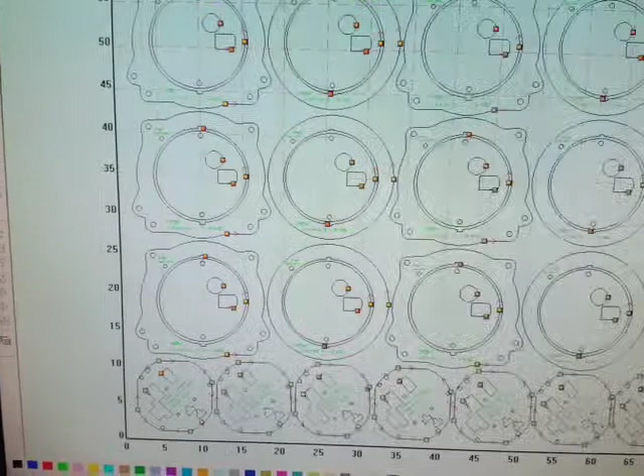Now this file, when you do File Open, this is a file that's set up. It has all the parts in there, has all the settings all ready to go. We only do this on a few different files for things that we cut a lot of and things that we cut all the time. But mostly you'll be doing this process here.

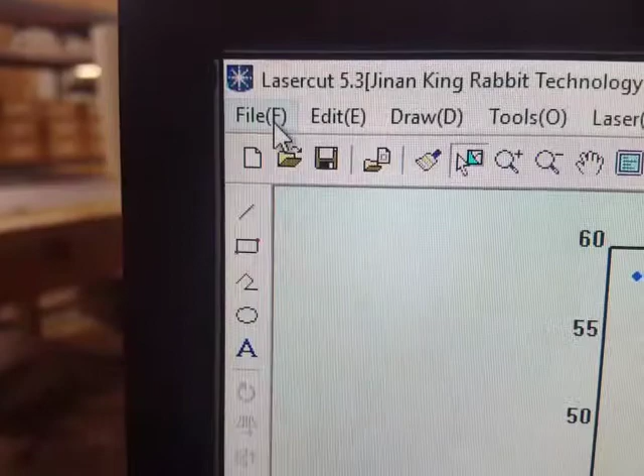So we're going to go to File, New, Save Changes - no, we're not going to save any changes. File, Import. So we're going to go ahead and open up a file. If it says cannot open, hit OK. Now you can open two types of files. It'll show a preview, then select Open, just like any Windows dialog. If it asks, can I import image data, just hit OK. That brings up the file.

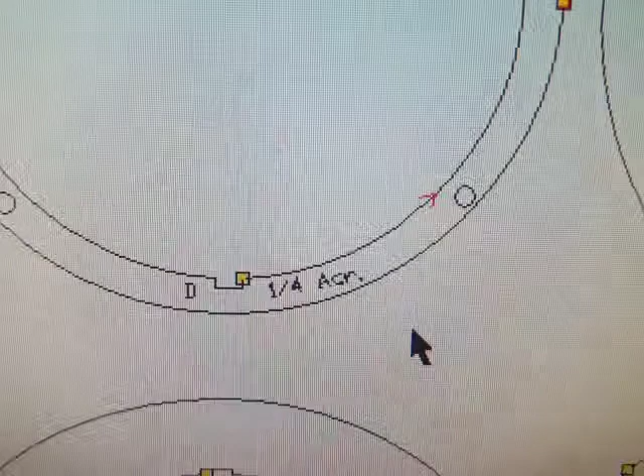Now I'm going to show you a couple things on the file itself. First thing is, on every file, it tells you what type of material, the thickness, what to do on everything. A general rule is - I'm going to click over here - anything like these callouts here are always engraved. So we don't cut those, we actually just lightly score the plastic so that the markings are on the parts.

The other thing to notice is, see how this circle is a complete circle? And this part here has all these little arrows on it. That means those are all segmented lines, and this piece will cut fine, but the laser will cut this piece, then this piece, then this piece, so it's going to take longer and be less efficient.

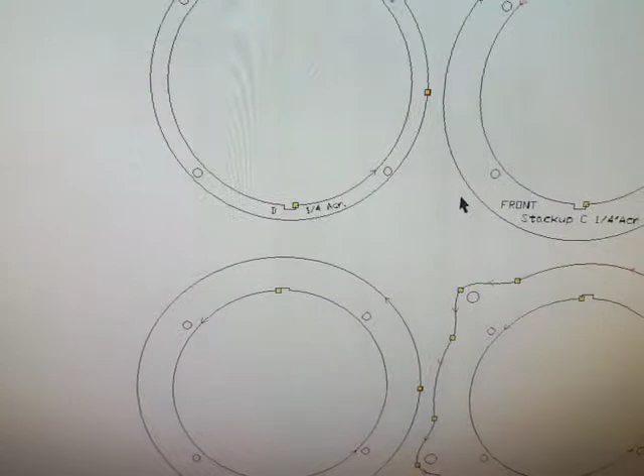Okay, so I'm going to show you two things right now. First thing is I'm going to show you how to set up a job with different colors to change the power settings. So first thing we're going to do is I'm going to show you how to get rid of these lines. So I'm going to zoom out and use my pick tool, which is that right there.

I'm going to select the job or the parts. Then I'm going to go to Tools, Unite Lines. You shouldn't need to touch this - usually 0.5 millimeter is fine. It says the tolerance - that means the tolerance that these lines will connect. I'm going to hit OK. There you go, see how that's one solid line now. Now that'll cut in one line.

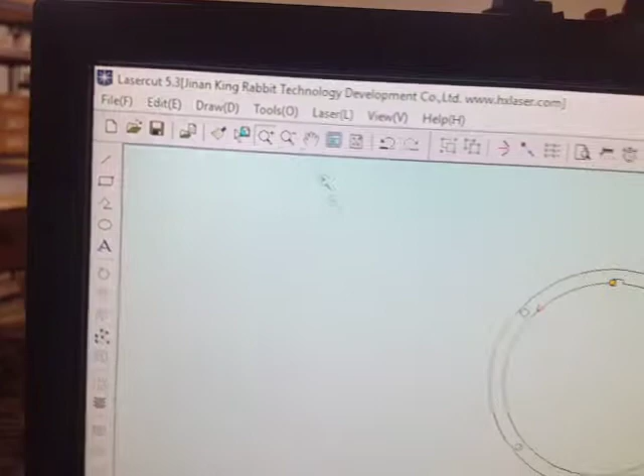Now to change - okay, here's another tool, you've got your zoom in, zoom out. I'm going to zoom in on this here, make it easier. Now I'm going to go back to my pick tool here, and I'm going to select this.

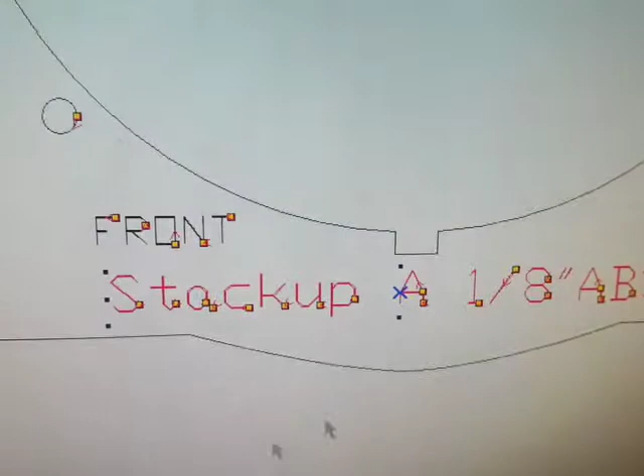And then I'm going to go down here to the colors. You can add whatever color, change it to whatever color you want. Click off it - now that's red. I'm going to change this to red as well. There we go, both red.

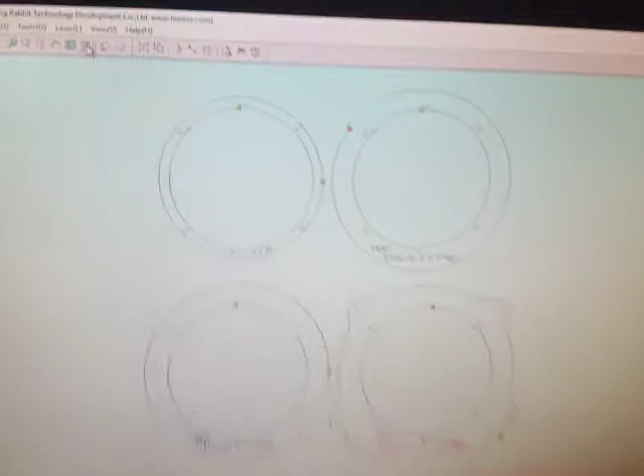Now what I'm going to do is I can use this - we'll zoom to everything if I use this one here. Okay, so I just noticed that this job is not on the actual table itself, so I'm going to select it, push Control Y. There we go, now we're on the page.

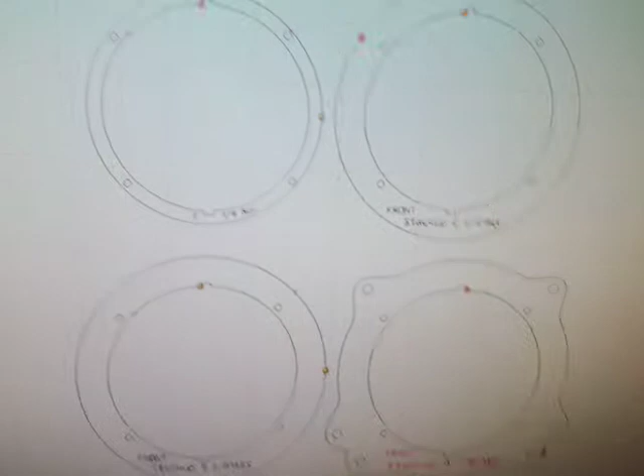Okay, so now I can do a couple things. I can zoom to the part. If I use this tool here, I can zoom to the table - it'll show the whole table. So now over here on this interface, I've got the red and the black. I can move these up and down. What this will do is change the order that the parts are cut.

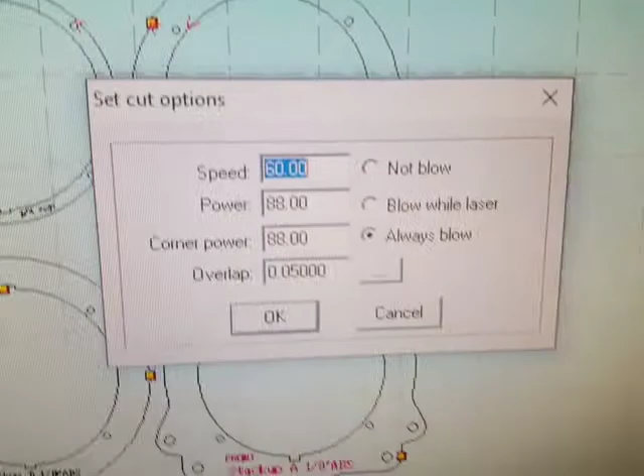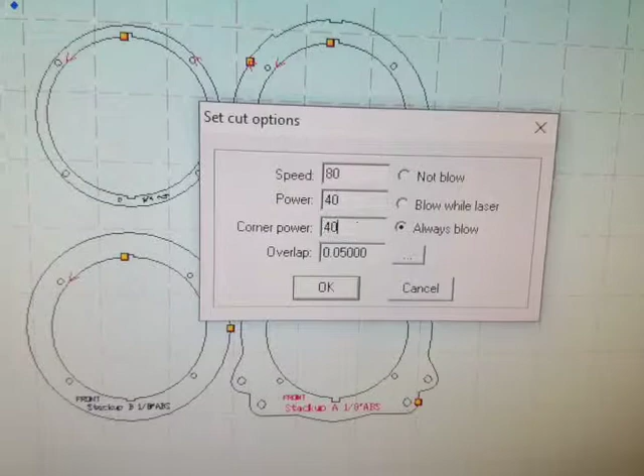To change this, for example, I'm going to make this lightly score on the red. So this dialog box will pop up. Over here on the wall are all the different settings that we need, so you can always refer to that. To do a light score, I'm going to change the speed to 80, power to 40, corner power 40. Generally, power and corner power are the same. The overlap is the amount that the laser will overlap where it starts and stops on these little arrows here. Hit OK. And then so we're going to lightly score this piece here.

As you can see, it says right on there 1/8 inch ABS. So I'll go look over here on my sheet. Okay. I'm going to go back over here to the setting, double click. I'm going to set that to 10, 88, 88.

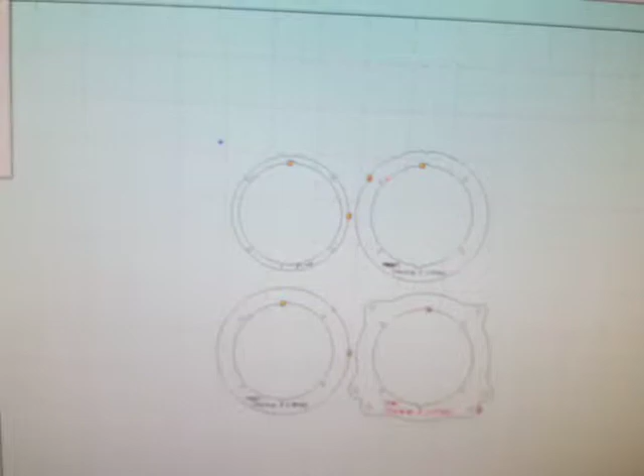Alright, so that's just a quick overview of that. So now let's actually run a job. Okay, so File, New, Save Changes - no. File, Import. We're going to cut some refractors.

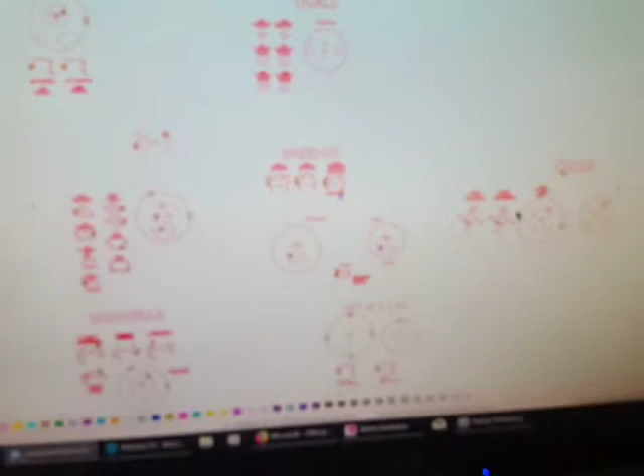Now, either in the build book, okay, this is our refractor file, has all the Phoenix refractor parts. So now what we're going to do, sorry, it's a little out of focus, I'm going to zoom in on a few things here.

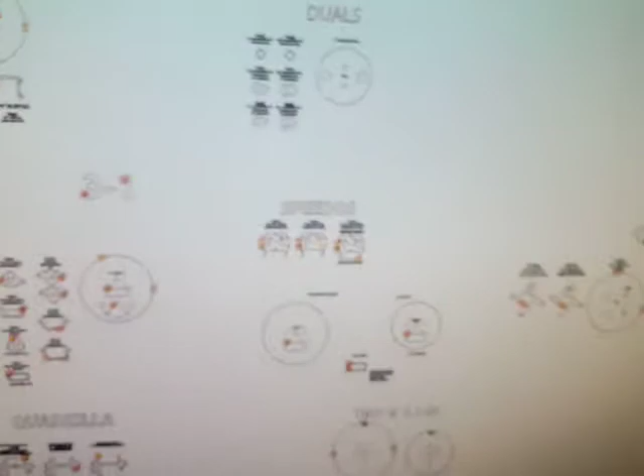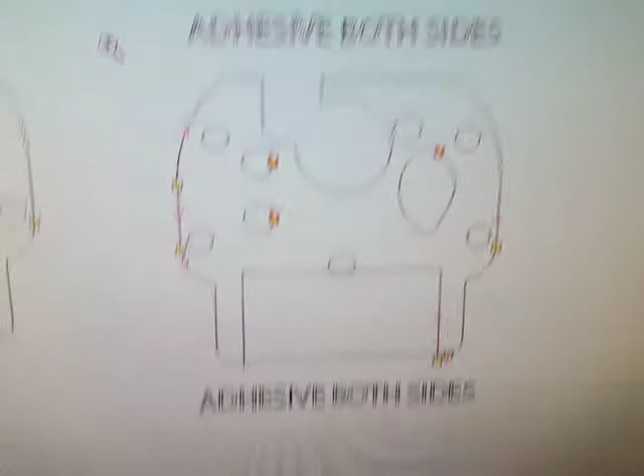Now, if it's not in the build book, it's in the file itself. So it always tells you the thickness, tells you if there's plastic. The parts always face up, so it says this piece would have adhesive on the back, 060 poly or ABS, adhesive backed, adhesive both sides. A lot of these parts, like this, will have a score mark. So it's pretty straightforward. If you have any questions, just ask.

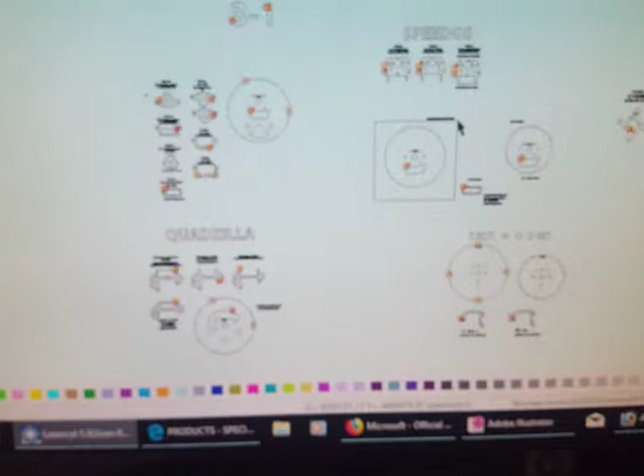So what we're going to do is cut some speedometer refractors. I'm going to grab this—make sure you grab the whole thing, it's okay even if you grab a little extra. I'm going to move that over here for now, and then cut some tachometer pieces. Move that over here. We're going to cut a few different things here.

Okay, so I've got the pieces I want over there just to get them out of my way. I'm going to delete all these things I don't need.

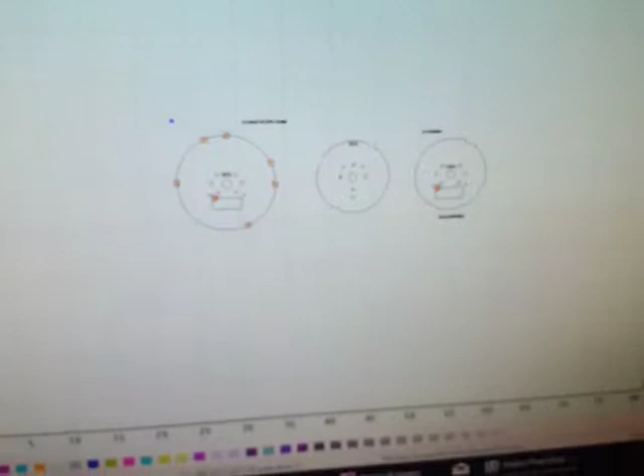Okay, now notice I don't see a grid on here, so that means we're not on the table. So I'm going to select all my parts, hit Control Y. Okay, all my parts are on the screen. I'll use my pick tool to delete some of these things.

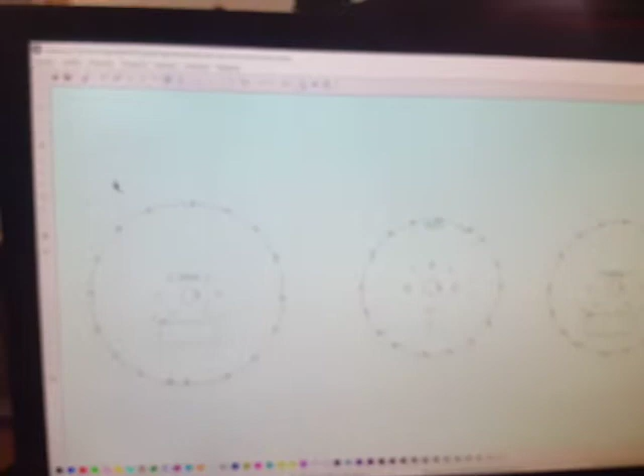Okay, now see how all these are segmented? Again, I'm going to select the parts, tools, unite lines. Okay, now they're all solid pieces. That'll make cutting a lot easier.

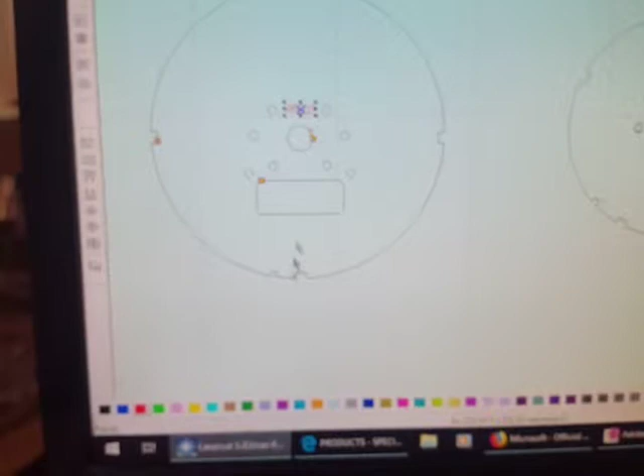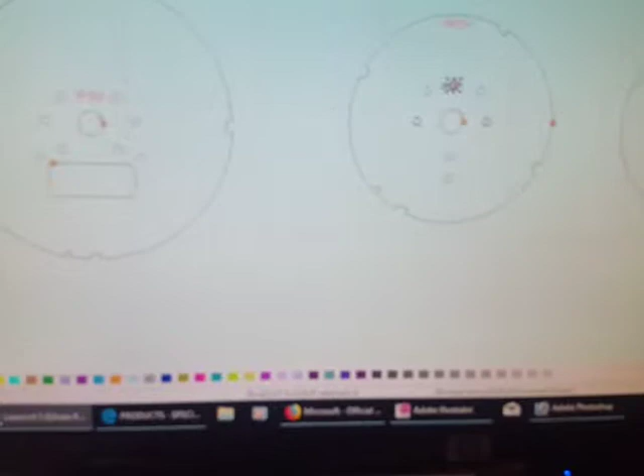So the next thing I'm going to do is change all these call outs to identify the parts. I'm just getting rid of some stuff we don't need.

Okay, so now I'm going to zoom out. Now the next step is using your plastic efficiently. Obviously we don't want to cut these parts just spaced out like that—we want to use the material efficiently. There's a couple ways you can move a part.

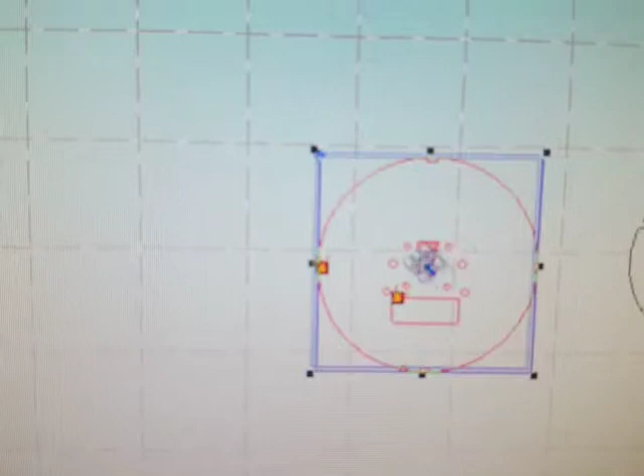You select the entire piece—see that little X on the center? Once your cursor goes like that, you can move it. Now, if you ever make a mistake, like let's say you do this, and then you go to move it, and the part gets messed up.

Oh, see, now the part's wrecked. You can always redo it, or you can hit Control Z to undo. Or you can go Edit, Undo, and it'll move it back.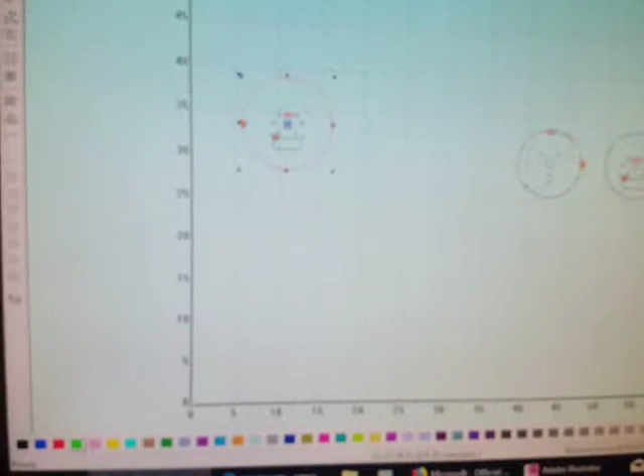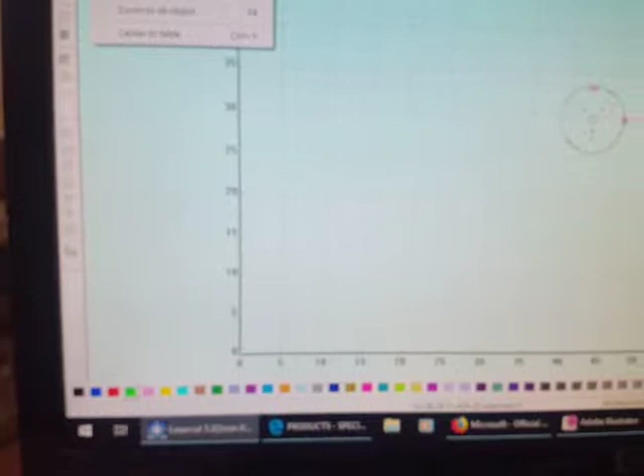Okay, so you can move the parts like this, but I recommend using the arrow keys—that'll make it much less problematic, especially when you're duplicating parts. So we're going to select the part, edit copy, edit paste, and then start moving these pieces till we fill up the screen. The general rule is the space between the parts should be greater than the thickness of the material.

Okay, so here is our job on the table, ready to go. This outline here is not the size of the table, it's the size of the plastic. So as long as you're within here, you should be good to go.

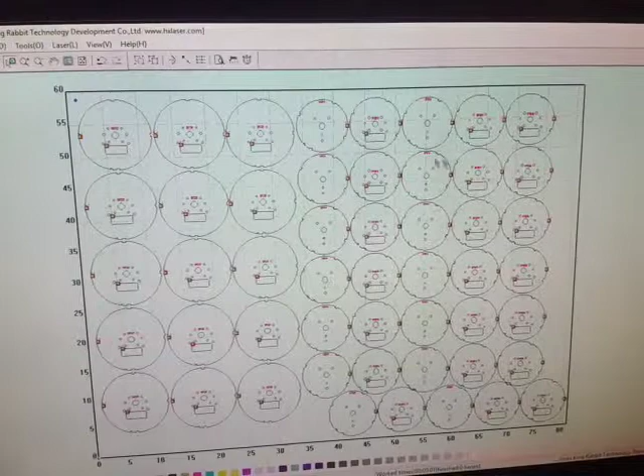Okay, so what we're gonna do is lightly score the red sections. I'll double click on that, dialog box opens, focus on that. All right, so we're gonna do 80... 33... 88.

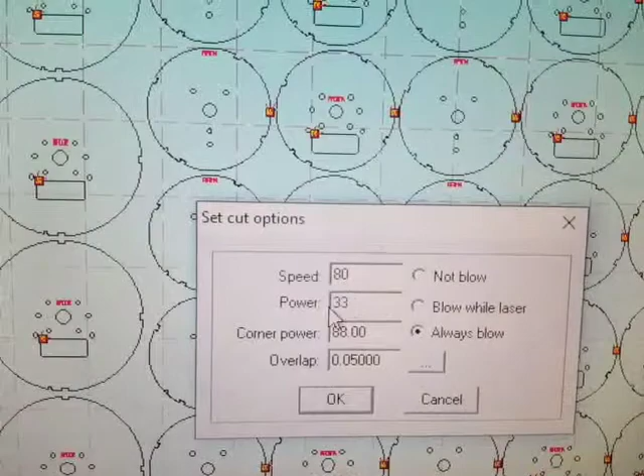Okay, then the black parts we're actually gonna cut according to our current sheet. 85.

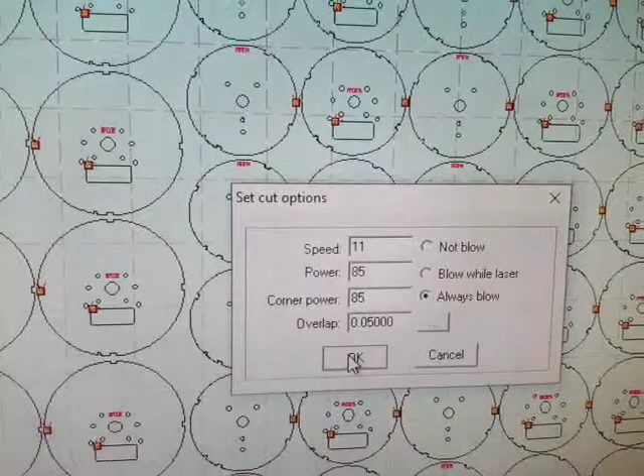Okay, everything's on there. Now what we're going to do is download it. We're going to go over here to the dialog box, download it. This will send the file to the laser.

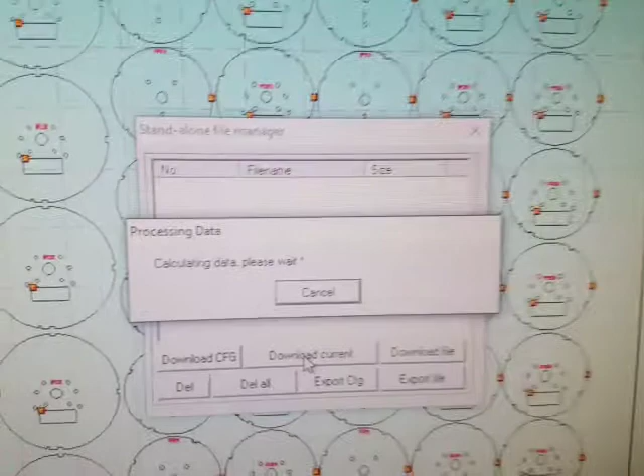So what we're going to do now is hit delete all. That will clear the job that's in there. Download current. It'll compile the file.

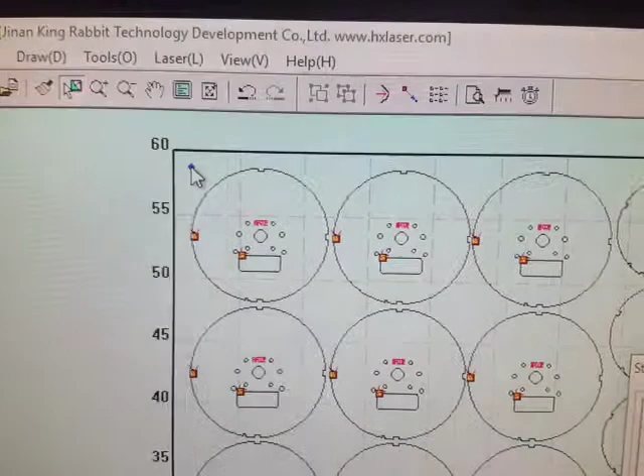Okay, now this little blue dot here, that's where the cutting will start. So it doesn't matter where these pieces are on the table—that's where the laser head will start. Always best to start in the upper left. Let's go over here to our laser.

Okay, let me get some more light up here. Now, for example, if we were going to start this job right now, it would start where this laser head is and work this way. That's how the laser always works.

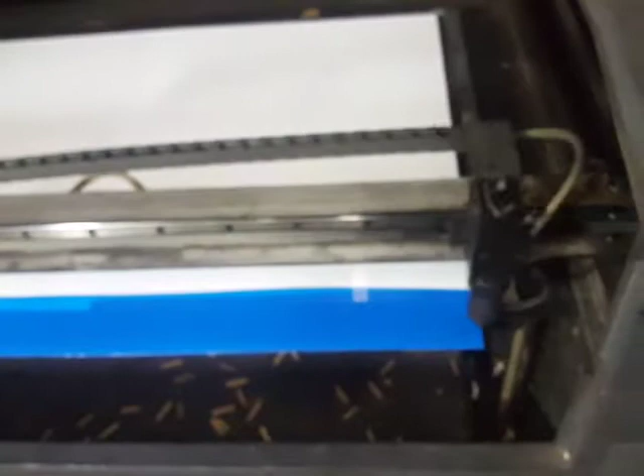Now what we're going to do is hit test. What that's going to do is give us an outline of the cut job. So I'm going to hit test. Okay, oh, looks like we got to move over a little bit. I am kind of cutting it close here. Okay, let's hit test again.

Make sure we're on our material—it's okay if we go over the edge a little. Alright, we're pretty good. Okay, now the next thing is this material has to be flat. It absolutely has to be flat or the laser will not be focused.

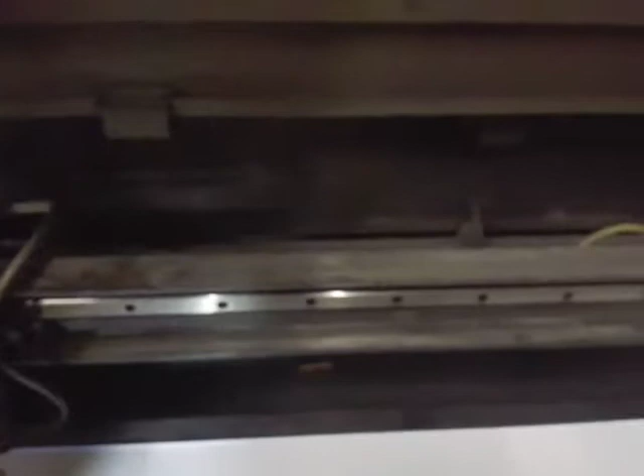So what we're going to do is use a series of magnets and clamps to hold it in place all the way around. We've got all kinds of clamps.

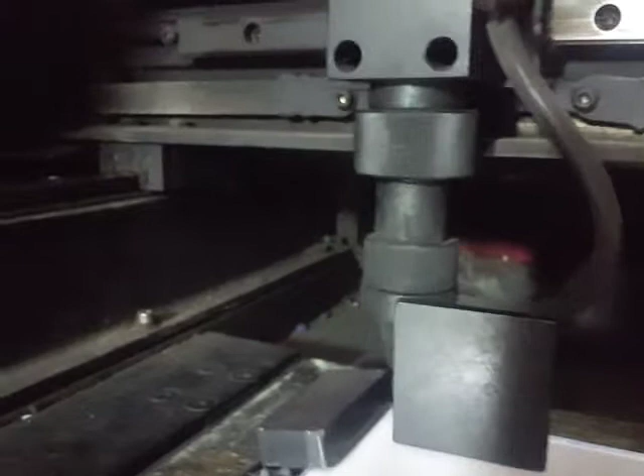Now we're going to talk about focus. This is our focusing block, and by moving the table up and down, we can focus the machine. Right there is where you want to be for all cut jobs. It's going to be between here and here, but you really want that lined up just below the top of that lip. Okay, that'll get you where you need to be.

Now different materials will have different backers—please refer to the sheet on that. This is clear, so we back it with paper so it doesn't get dirty while it's being cut. Then what we're going to do is close the lid, push start, and the job will start running.